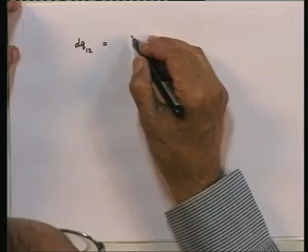Last time, we had derived the expression for the rate of heat exchange between two differential areas dA1 and dA2 at temperatures T1 and T2. Let me repeat that expression: dQ1 to 2 equals sigma by pi, cosine beta 1 cosine beta 2 divided by L squared, multiplied by T1 to the power of 4 minus T2 to the power of 4, dA2 dA1. That was the expression which we had derived.

That is where we stopped, we got this expression. Now we want to extend this expression to the situation where we have two finite size black surfaces maintained at uniform temperatures T1 and T2. That is what we want to do.

So let us go back and see the sketch again. These are the two surfaces. This is surface A with an area A1, and this is the surface with area A2. Let me write this again in big letters since it is rather small here. This is A1, this is the finite area A2. They are both black, and A1 is maintained at a temperature T1, A2 is maintained at temperature T2. We would like to know what is the net radiant heat exchange rate between A1 and A2.

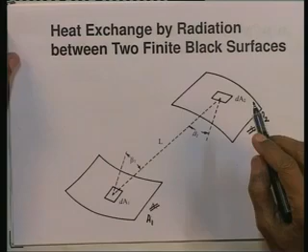Now suppose I take some differential area dA1 on A1 and some other differential area dA2 on A2, join the two areas by this line, and let the length be L like last time. Then we know the expression for heat exchange between dA1 and dA2. So let us extend that now.

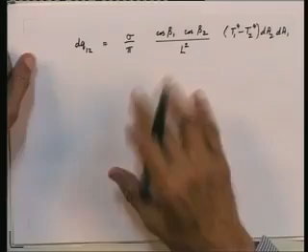Obviously, if we want to know the value for two finite size surfaces, and we know the expression for two differential areas, it follows that all we have to do is integrate the expression for differential areas. We will have to integrate over the area A1 and also over the area A2. So if I want Q1 to 2, that is the heat exchanged by radiation between A1 and A2, canceling out the d, I will integrate this expression twice, over the area A1 and A2.

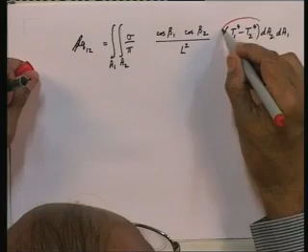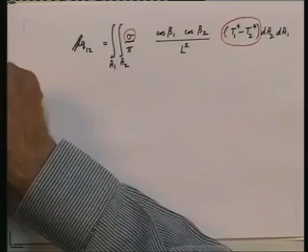That is our expression for Q1 to 2. Now, T1 is a constant, T2 is a constant, so T1 to the power of 4 minus T2 to the power of 4 is a constant. I can take it outside the integral, and let me also take sigma outside the integral. If I take both these outside, which is permissible, then I will end up with the expression. Let me show that.

As is written here, if the surfaces A1 and A2 are at uniform temperatures T1 and T2, then the net radiative heat exchange rate between A1 and A2, Q1 to 2, becomes the following. I have just taken sigma and T1 to the power of 4 minus T2 to the power of 4 outside the integrals, because they are constants, and the quantity within square brackets is the integral which I will have to perform first over the area A2 and then over A1, or vice versa - it does not matter.

Now let us again, like in the earlier situation, define a shape factor. This expression is fine, but let us put it in terms of a shape factor. So we define the shape factor of surface 1 with respect to surface 2, f1 to 2, as 1 upon A1 times the quantity which I had earlier within square brackets - that integral over A1, integral over A2, of cosine beta 1 cosine beta 2 upon pi L squared, dA2 dA1.

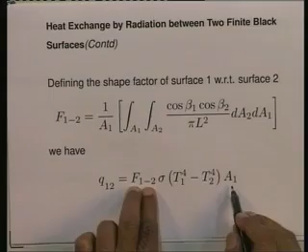Note that the definition is not just some arbitrary definition, we have defined it in that manner. If I take the first part, f1 to 2 sigma T1 to the power of 4 into A1, you can see sigma T1 to the power of 4 into A1 represents the total amount per unit time emitted from surface 1. If I multiply by f1 to 2, I get the amount that goes from 1 towards 2, is intercepted by 2, and because 2 is black is also absorbed by 2. So again, I am defining shape factor with that physical meaning in mind, it is not some arbitrary definition with an integral in it, keep that in mind.

Alright, so we could also define a reverse shape factor, in the reverse direction, that is from surface 2 to surface 1. I could say f2 to 1, the shape factor of 2 with respect to 1, is equal to 1 upon A2, the integral over A1, the integral over A2, cosine beta 1 cosine beta 2 pi L square dA2 dA1, the same quantity within the square bracket that we had earlier.

And therefore we could say q1 to 2 is equal to f2 to 1 sigma T1 to the power of 4 minus T2 to the power of 4 multiplied by A2. We should note again that the two shape factors f1 to 2 and f2 to 1 are related by a reciprocal relation, f1 to 2 A1 is equal to f2 to 1 A2. Keep this in mind, that is a reciprocal relation relating the two shape factors, they are not two independent quantities. So we have expressed the quantity q1 to 2, which represents the net radiative heat exchange rate between 1 and 2, in three ways.

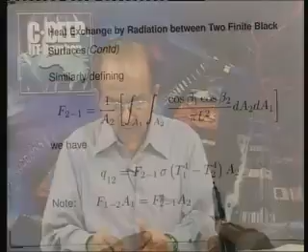First, we have expressed it without a shape factor, that was the first expression which we got simply by putting two integrals on the expression for dq1 to 2. Secondly, we have expressed it in terms of f1 to 2, and said q1 to 2 is equal to f1 to 2 sigma T1 to the power of 4 minus T2 to the power of 4 multiplied by A1. We have also expressed it in the reverse manner by saying q1 to 2 is equal to f2 to 1 sigma T1 to the power of 4 minus T2 to the power of 4 into A2. We got three different ways, all equivalent, for the same quantity.

Alright, now we want to move ahead. We have considered two situations. What are they? We have considered heat exchange rate between two differential areas dA1 and dA2, and we have considered heat exchange rate between two finite sized areas A1 and A2.

Now suppose we have a situation in between the two, that means we want to consider heat exchange by radiation between a finite black surface, that is one area is big and one is small. Small means like a differential area, a small black surface A1 which is like dA1. Suppose we have this situation, a small area and a large area, and we want to calculate heat exchange rate between them, heat exchange by radiation between them, if they are maintained at two temperatures T1 and T2. So that is the next situation, the third situation, which is in between the first two situations we have considered, and this is rather easy to derive. It should not be a problem.

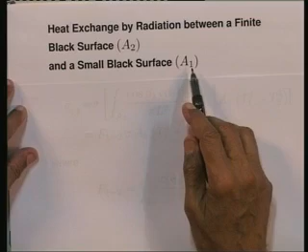Let us go back again. So let me repeat, we are deriving the heat exchange by radiation between a finite black surface A2 and a small black surface A1. That is what we are doing now. A1 can be treated like dA1, keep that in mind, because it is small. So to derive it, go back to our initial expression for dq1 to 2. What was our expression?

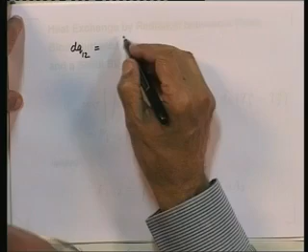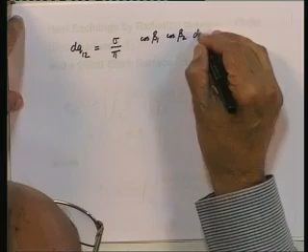dq1 2 between two differential areas: sigma by pi, cosine beta 1, cosine beta 2, dA1 dA2 divided by L squared, multiplied by T1 to the power of 4 minus T2 to the power of 4. That is our expression for heat exchange by radiation between two differential areas.

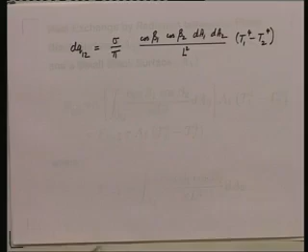Now we want to modify this expression when one area is small and one is large. The small area is A1 and we can treat it like dA1. That means I can simply replace dA1 by A1, because it is a small area. Once again, T1 is a constant, T2 is a constant, so I can take this expression outside the integral sign.

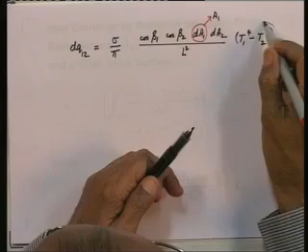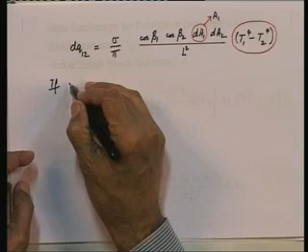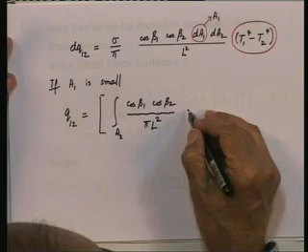So, what do we get now? If A1 is small, I need not perform the integration over A1 and can treat dA1 as just A1, and I will simply get q1 to 2 in this case equal to the quantity within square bracket, which is the integral over A2 only, of cosine beta 1 cosine beta 2 divided by pi L squared dA2, the whole thing multiplied by sigma A1 times T1 to the power of 4 minus T2 to the power of 4.

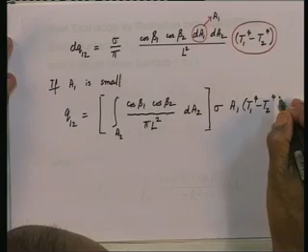That is what we get as the expression for Q12. So, all we have done is substituted A1 for dA1, because A1 is small, equivalent to a differential area, and taken T1 to the power of 4 minus T2 to the power of 4 outside, because they are at uniform temperatures, so that expression is a constant, and the rest within the square bracket is obviously a shape factor.

So, I can say this is equal to F1 to 2 sigma A1, T1 to the power of 4 minus T2 to the power of 4. So, again now I have an expression for the heat exchange by radiation between a small surface A1 and a large surface A2, and the expression is given here. I can use the first expression, or I can use the second expression in terms of a shape factor F1 to 2, being nothing but the quantity within the square bracket.

So, the shape factor F1 to 2 is nothing but the quantity within the square bracket. And again it has the same physical meaning: it stands for the fraction of the radiation emitted by 1 which goes towards 2 and is intercepted by 2. That is the meaning of the shape factor.

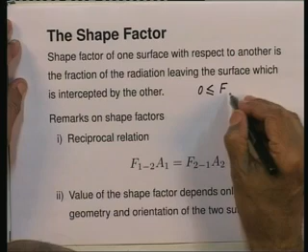Now, let me again define shape factor. I have done it earlier, but I repeat: the shape factor of one surface with respect to another is the fraction of the radiation leaving the surface which is intercepted by the other. That is our definition of shape factor. By definition, shape factor must be between 0 and 1, a number between 0 and 1. Let me write that here: by definition, shape factor f, whatever it be, between two surfaces A and B, must be between 0 and 1. It is bounded always by definition.

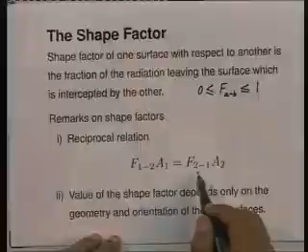Now, let us make some remarks on shape factors. The first remark, which I have made earlier and am repeating, is that between the shape factors of two surfaces 1 and 2 - the shape factor of 1 with respect to 2 is called f1 to 2, the shape factor of 2 with respect to 1 is called f2 to 1. Between these two shape factors, by definition, we have the relationship f1 to 2 times A1 equals f2 to 1 times A2. We have this definition, by definition we have this relation. This is called the reciprocal relation.

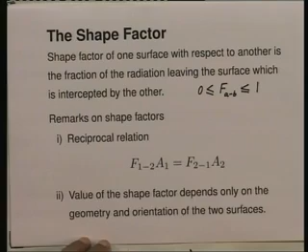Now, it is an obvious relation because it follows from the definition, but the real reason why I am mentioning it is to point out the utility of this reciprocal relation. The relationship is particularly useful when one of the shape factors, either f1 to 2 or f2 to 1, is unity.

Now, when does this happen? When is the shape factor f1 to 2 or f2 to 1 equal to unity?

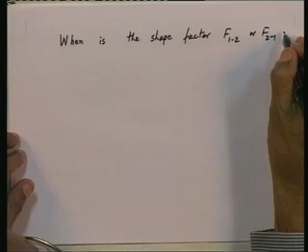If you ask the question, obviously if all the radiation emitted by surface 1 is intercepted by 2, none of it goes back to 1, then the shape factor of 1 with respect to 2 is unity. Or the reverse, f2 to 1 will be unity when all the radiation emitted by 2 is intercepted by 1, it goes nowhere else, it does not even go back to 2.

And when does this happen? This will happen when the surface 2, I am talking of f1 to 2, will be unity when surface 2 completely surrounds 1 and surface 1 is completely convex. Let me give an example.

Suppose I have a sphere, or a spherical shell, it does not matter, and I call it surface 1. Let us say this sphere is inside a room, a sphere of any size inside this room. So let me draw this room here, it is a rectangular room with 6 faces. On this paper I am drawing only 4, but remember it has 6 faces. I will call this the surface 2, the room.

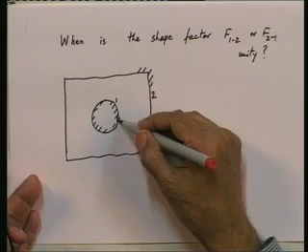Now, consider radiation emitted from the surface of 1. Surface 1 is spherical, it is a sphere. Radiation emitted from any element on surface 1, anywhere, has to first hit 2, it has no choice. Therefore, in this case f1 to 2 is equal to 1, got it.

But mind you, suppose just to illustrate, 2 surrounds 1, but that is not enough. No radiation from 1 should go back to 1 itself. Consider for instance that the object inside, that is 1, is not a sphere but has some shape like this, and this is still surface 2, which is this room.

Now you can see if I take an element on this surface, radiation going out from any element like this, some of it will go and hit surface 1 itself. So if the surface of 1 is concave in some place, not everywhere but any place, then part of the radiation from 1 will come back to 1 itself, in which case f1 to 2 will not be equal to 1.

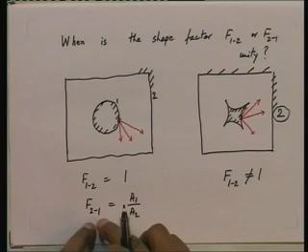If you see from the definition, f2 to 1 will have a double integral expression, which is not easy to solve. But using the reciprocal relation, I can straight away tell f2 to 1 is equal to a1 upon a2. So you see the benefits of using the reciprocal relation in some cases.

So that is the first remark we wanted to make about shape factor. The second remark, which is rather important, is the following: the shape factor depends only on the geometry and orientation of the two surfaces.

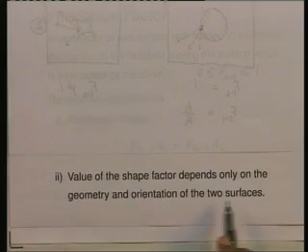You will notice when we put the definition, we took temperature outside the definition. There is no T1 or T2 in that definition. So shape factor does not depend on the temperatures of the surfaces, it depends strictly on the geometry.

What are the shapes, what are the sizes of the surfaces involved, what are the relative orientations, how are they oriented with respect to each other. That is what shape factor depends on.

Because of this definition, I can do shape factor calculations in advance for a variety of shapes and situations encountered in practice. I do not need to know their temperatures for calculating radiant heat exchange. For geometries frequently encountered in practice, for those shapes, sizes, orientations of surfaces, I can do shape factor calculations and have those available as values which I can use any time for doing radiant heat exchange calculations, and that is what people do.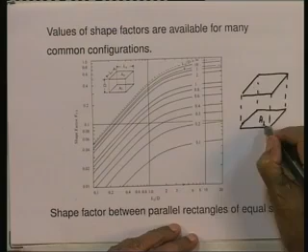Since it is not so clear, let me draw it again. One parallel rectangle could be this, and the other parallel rectangle of equal size, which is below, is this. I call this surface 1, A1, and this 2, A2. A1 and A2 are two rectangles of equal size, parallel to each other and opposite each other, like the floor and the ceiling of this room.

These are two parallel rectangles of equal size facing each other, or the two walls of this room, the two side walls which I am pointing to. These two are two rectangles of equal size facing each other, or the other two walls, one behind me and one in front of me, they are also like that. So any two walls, the floor and the ceiling, are two parallel rectangles of equal size facing each other.

The shape factor for that has been calculated, and that is what is given in this graph. The shape factor f1 to 2 is plotted, read off from the y axis, and it is given as a function of

two parameters, L1 by d and L2 by d. That is how it is given. L1 and L2 are the sides of the rectangles - this is L1 and this is L2 - and d is the distance between the two rectangles.

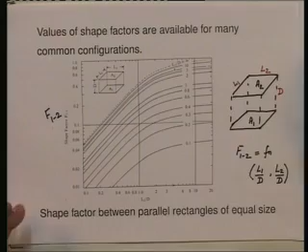So the shape factor f1 to 2 is given as a function of L1 by d and L2 by d. That is what we have in this graph. So any time you have this situation in practice, all you have to do is, for the given situation, calculate the two parameters L1 by d, L2 by d, and go to this graph.

L2 by d is given on the x axis, and L1 by d is the parameter which is varying between each graph drawn here. So in this case, this is the graph for L1 by d equal to 1, L1 by d equal to 2, L1 by d equal to 3. The final one which is dotted is L1 by d equal to infinity.

So all values of L1 by d from 0.1 to infinity are covered in this graph. Similarly, L2 by d is covered from 0.1 to 20. So all situations in practice are covered in this graph. For a given situation, calculate L1 by d, calculate L2 by d, go to this graph at L2 by d, go to the appropriate curve for L1 by d, and read off the value of f1 to 2. That is what you will have to do.

Now, this is just one example I showed. This is one example of shape factor calculations which have been done by somebody else, which are available to us for usage whenever we have to do radiant heat exchange calculations. Such graphs or equations corresponding to these graphs are available for a very wide variety of common configurations, a very large number of them are available. Let me show you one more example, so that you get the idea. Here is one more example now.

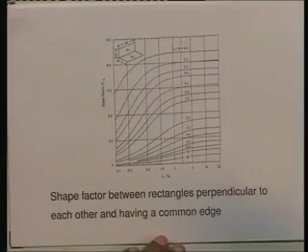Here is a shape factor between rectangles which are perpendicular to each other and have a common edge. It is drawn rather small here, so let me draw it again.

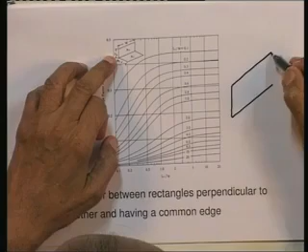These are two rectangles: this is one rectangle, this is another rectangle. They have a common edge and are perpendicular to each other, and the dimensions are L1 and L2 and W. So one of the rectangles is L1 into W, the other one is L2 into W, and they are at right angles to each other.

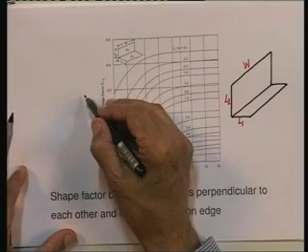We would like to know the shape factor. Now, for this case also, shape factor has been calculated and is available to us. On the y axis we have f1 to 2, on the x axis we have L2 by W, and the different graphs drawn are for varying values of L1 by W.

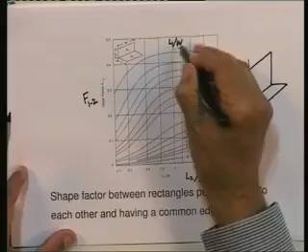So given a particular situation, say this could be the floor of this room and one of the side walls, or the ceiling of this room and one of the side walls. There are two situations of two rectangles at right angles to each other with a common edge. It could be any one of these.

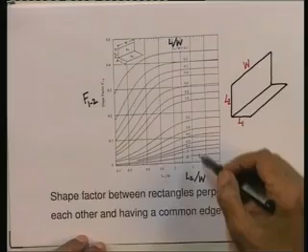Now, given this situation, to do a radiant heat exchange calculation, calculate L2 by W, calculate L1 by W, and then from this graph read off the value of f1 to 2. So f1 to 2 is a function of L1 by W and L2 by W.

Got it? So again, this is a very common configuration, and somebody has done this integral for us and we have got the expression for us to use any time we need it. As I said, there are literally hundreds of situations for which shape factor calculations have been done, and the values are available either in the form of graphs, equations, tables, whatever it is, for us to use any time we have to do radiant heat exchange calculations.

So this is the second remark: the value of shape factor depends only on geometry. It has been calculated for a wide variety of situations and configurations which are commonly used in practice, and these are available in textbooks and handbooks for us to readily use.

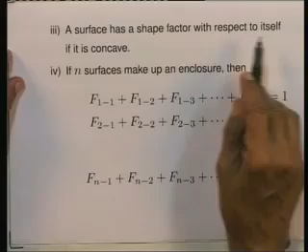The third remark I want to make is the following, which I made earlier and am repeating: a surface has a shape factor with respect to itself if it is concave. This is a remark I made a little earlier, but let me repeat it. What I mean is the following.

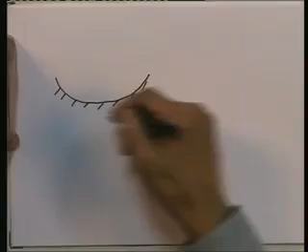Suppose I have a surface like this, a concave surface, surface 1, emitting radiation. If I take some element on this surface, radiation is emitted in all directions of a hemisphere, but some of the radiation emitted is obviously going to come back to the surface itself. So in this case, because the surface is concave, it follows that f1 to 1 is not equal to 0.

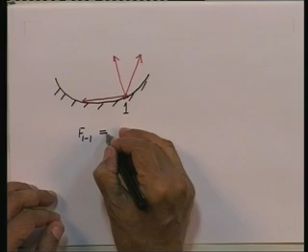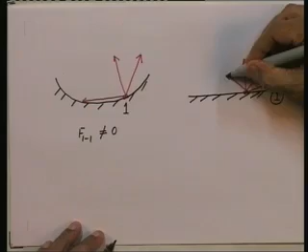On the other hand, if surface 1 is flat, and I consider radiation emitted from any elementary area on this surface, you will agree that radiation emitted from surface 1 anywhere on it will go out like this and will not be intercepted by surface 1. So this is a case where f1 to 1 will be equal to 0. Or let us take the case when surface 1 is convex like this—then also f1 to 1 is obviously equal to 0.

Now mind you, just to clarify, surface 1 may be flat, surface 1 may be curved, or surface 1 may be consisting of two flat surfaces together—that also may be surface 1.

For instance, let us go back to this room. Here is our room—let me draw it in 2 dimensions. This is my room, in which I am sitting. If I want to do a radiant heat exchange calculation and treat all the surfaces, the 6 surfaces of this room, as being independent, I will call them 1, 2, 3, 4, and the 2 surfaces which I can't show here, which in 3 dimensions will be seen as 5 and 6. So I will have 6 surfaces.

Now if I treat the 6 surfaces as independent of each other, f1 to 1, f2 to 2, f3 to 3, for each of these surfaces will be 0. But let us say surface 1 and 2 are at the same temperature. So for purposes of calculating radiant heat exchange, I can treat 1 and 2 as one surface. Then it follows that surface 1 and 2, if I treat it as one surface, call it surface A.

It follows that for this surface A, which consists of 1 and 2 together, 2 rectangles together with a common edge, the shape factor of surface A with respect to itself will be non-zero. For this case, f 1 to 1 was 0 if 1 is only a flat surface, and f 2 to 2 will be 0, but if 1 and 2 are treated as one surface together, call it A, that is 1 plus 2 equivalent to surface A, then f A to A

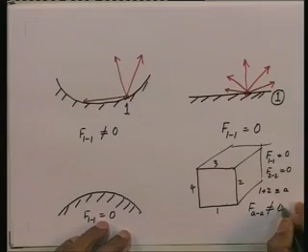is non-zero. So a surface may be flat, a surface may be curved, a surface may be a combination of 2 flat surfaces, 2 curved surfaces, 1 flat and 1 curved surface, whatever it is, it is up to me to decide depending upon the radiant heat exchange calculation I have to do. For that situation, once I have defined what my surfaces are, I have to see whether f 1 to 1 or f A to A is 0 or non-zero. This is a remark about a surface having a shape factor with respect to itself.

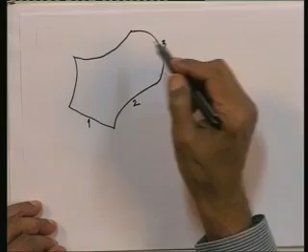Now let us go to one more important relation. Suppose I have an enclosure made up of n surfaces. Let us say I have some enclosure, and just to make things messy, I have drawn one as a flat surface, surface 1, surface 2 as a convex surface, surface 3 as a concave surface, then surface 4 again as convex, and surface 5 also as convex. I have drawn a 5 surface enclosure in 2 dimensions here. Let us say these 5 surfaces make up an enclosure. I could think in general terms of an n surface enclosure making up an enclosure.

So the n surfaces may be flat, they may be curved, the curved surfaces may be convex or concave, it does not matter. Now if these n surfaces, 1, 2, 3 up to n, make up an enclosure, then it follows that all the radiation emitted from any one surface, say surface 1, has to go to all the other surfaces, that is surface 2, 3, 4 etc.

up to n, and to surface 1 itself if f 1 to 1 is non-zero. So I can state that as follows. For an n surface enclosure, f 1 to 1 plus f 1 to 2 plus f 1 to 3 plus dot dot dot f 1 to n is equal to 1, because all the radiation emitted from 1 has to go either to 1 or to 2, 3 up to n, all that must add up to 1. And if 1 is a flat surface or if 1 is convex, then this f 1 to 1 will automatically be put as 0.

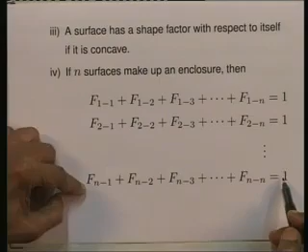Similarly, consider the radiation emitted from surface 2. It follows that f 2 to 1 plus f 2 to 2 plus f 2 to 3 plus f 2 to n is equal to 1, and so on. If I consider the nth surface of this enclosure, f n to 1 plus f n to 2 plus f n to 3 dot dot dot f n to n is equal to 1. So I can write down n such equations for the n surfaces making up this enclosure. These are relations between all the shape factors when surfaces make up an enclosure, and we will use these to calculate one shape factor from another.

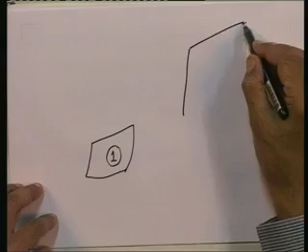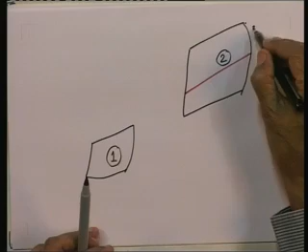That is the advantage. The last remark I want to make is the following. Suppose I have two surfaces, 1 and 2. Let us say I have surface 1, some arbitrary surface, may be curved or may not be curved, and let us say I have surface 2 like this, arbitrarily located in space, two finite size surfaces. Let us say I break up surface 2 into two parts, calling this surface 3 and this surface 4. That means A2 is equal to A3 plus A4. The two surfaces 3 and 4 make up surface 2.

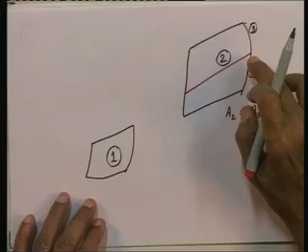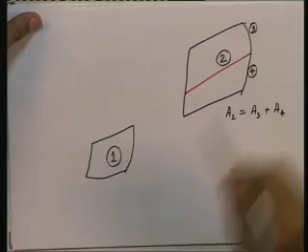Now, radiation going from 1 towards 2, the fraction of radiation going from 1 towards 2 is F1 to 2. It follows that since 3 and 4 make up 2, F1 to 2 must be equal to F1 to 3 plus F1 to 4. It follows, isn't it? So let me show that in writing. It follows that F1 to 2 must be equal to F1 to 3 plus F1 to 4 if the two areas A3 and A4 make up the area A2. Keep that in mind. But note, the reverse is not true.

Many people sometimes will say F2 to 1, F3 to 1 and F4 to 1. These are the reverse shape factors in the reverse direction. This F2 to 1 is not equal to F3 to 1 plus F4 to 1. Keep that in mind. All right. From the definition itself you can see that this is not true. F2 to 1 is not equal to F3 to 1 plus F4 to 1. Please do not make this mistake.

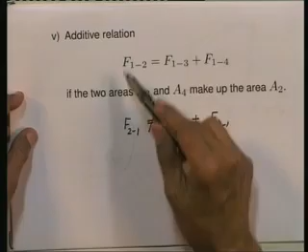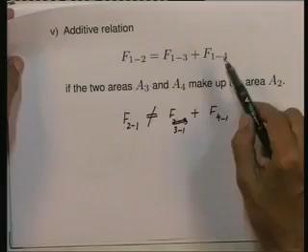The additive relation which we can use is F1 to 2 is equal to F1 to 3 plus F1 to 4, and this follows from the physical meaning of shape factor. Radiation going from 1 intercepted by 2. If 2 consists of 3 and 4, radiation going from 1 towards 3 and from 1 towards 4, the sum of the two fractions must be equal to the first fraction F1 to 2. So keep this in mind. The first relation is valid, the second is not. The first one is called the additive relation.

So these are various relations between shape factors that we have given, and the advantage will be obvious from various situations which we have to consider. Now we will do some problems in which we calculate shape factors for a variety of situations, so that you get used to using these relations. I am going to do some problems. So the first problem I am going to do is the following. Let us do the following problem.

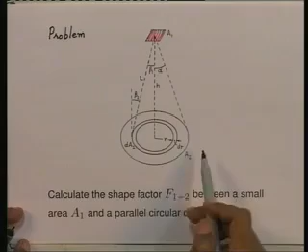Calculate the shape factor F1 to 2 between a small area A1 and a parallel circular disc A2. Here is the small area A1, let me just shade it in red. It is a small, differential area A1, and parallel to it a circular disc A2 is like this. So we have this table, on this table I have a circular disc. At the center of the disc, let me draw a perpendicular at the center of this disc and go up a certain distance h. At that distance h, consider a small area A1, a differential area parallel to the plane of this table. All right, that is what we are talking about.

We would like to calculate f1 to 2. We are going to use obviously the formula which we derived for shape factor between a small area A1 and a large area A2. So what is the formula? Let me just put that down.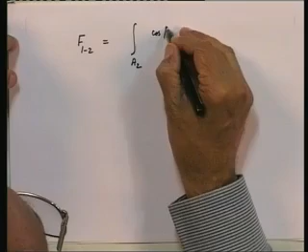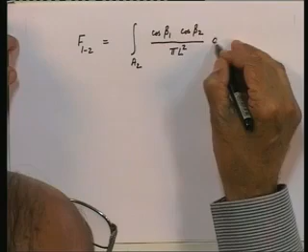For such a situation, we know f1 to 2 for the case with a small area. If you go back in your notes, you will see it is nothing but the integral over A2 of cosine beta 1 cosine beta 2 divided by pi L squared dA2. Okay, that is our expression.

Now let me go back to the sketch here. We must take our dA2. In this case, we have symmetry. We want the radiation coming from one which falls within this cone. All right. So since we have symmetry, for dA2, I can take a ring of thickness dr at some radius r. We have got symmetry all over. I do not have to take dA2 as r d theta dr in cylindrical polar coordinates. I can take a ring at a radius r of thickness dr. So my dA2 will be 2 pi r dr.

Okay, let us take that as our dA2. So take dA2 to be, let me write that down, because of symmetry, we will take dA2 to be 2 pi r dr. And therefore, I can now perform the integration.

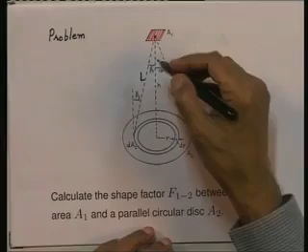I say the distance between the two surfaces is h and the semi vertex angle, let me again show the sketch. The distance between the two surfaces is h, the semi vertex angle subtended by this disc, circular disc, at A1 is alpha. Now, using our nomenclature, if I join A1 to dA2, the distance between the two will be the capital L which we have in our formula, and the angle made by this line joining A1 to dA2 and the normal, the two normals will be parallel to each other because the two surfaces are parallel, and the angles, this will be beta 1 here and this will be beta 2 here, and they will be equal in this case.

So let us substitute into our expression now, we will get f1 to 2, we are going to express everything in terms of the angle as the variable beta 1.

So we will get f1 to 2 is equal to cosine beta 1, cosine beta 2 is equal to beta 1. So I can write it also as cosine beta 1 divided by pi.

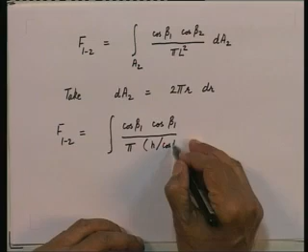Now instead of L, I will write L as h, the distance between the two surfaces, divided by cosine of beta 1 the whole squared, because beta 1 is my variable. For dA2 I will write 2 pi, for r I will write h tangent beta 1, that is r, and for dr I get by differentiating h tangent beta 1, I will get h secant squared beta 1 d beta 1.

That is my expression, and I will have to integrate this from 0 till the semi vertex angle which is alpha. So I will integrate this from 0 to alpha, that is over the whole area, then I will cover the whole area of the disc.

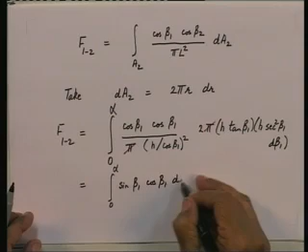If I do that, now I am skipping the details here, you can do the simplification, you can see that the cosine beta 1s will cancel out quite a bit, the pi's will cancel out quite a bit, etc. But it is very easy to show that this will reduce to nothing but the integral 0 to alpha sin beta 1 cos beta 1 d beta 1, very simple, you can do that yourself. And if I perform the integration and put in the limits, this will reduce to sin squared alpha.

So this is an example of the calculation of shape factor between a small area A1 and a parallel disc A2. It is a very simple example just to illustrate how to pick an area dA2 and to do the integral.

Now let us go on to another situation. I would like to calculate the shape factor using the graphs which I showed you earlier. So let us pick on another problem. We are going to do the following. I will just state the problem today.

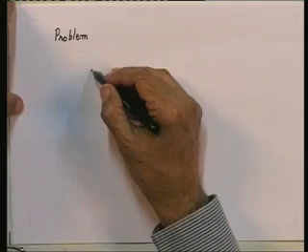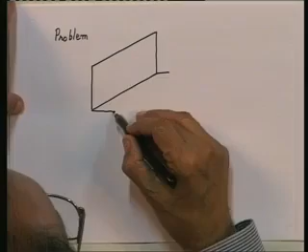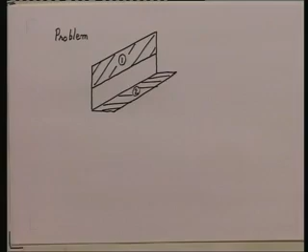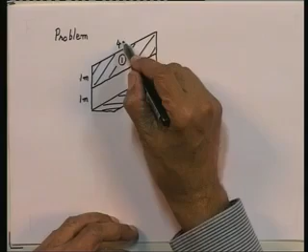The problem is the following: we have two rectangles like these. This is one rectangle, surface 1, and this is the second rectangle, surface 2. We want f1 to 2, dimensions are given: this is 1 meter, this is 1 meter, this is 4 meters, and this is also 1 meter. So these are two rectangles, 1 and 2, they are at right angles to each other, but they do not have a common edge.

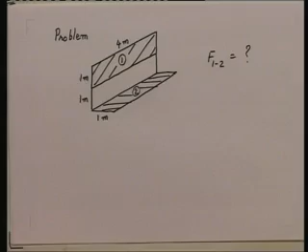We would like to get f1 to 2. Now mind you, I cannot read this off directly from the graph which I had earlier for two rectangles with a common edge. In that situation, remember we had the common edge case. Here we do not have a common edge, 1 and 2 are at right angles but do not have a common edge. Suppose I call this area, this rectangle, as surface 3, and I call 1 and 3 together as surface 4.

Now what can I read from the graphs which I showed you earlier? We can from those graphs get f3 to 2, this is known, or f2 to 3. Similarly we can get f4 to 2 or f2 to 4. These are available to us. So I need to express f1 to 2 in terms of these quantities, and that is what we can do very easily.

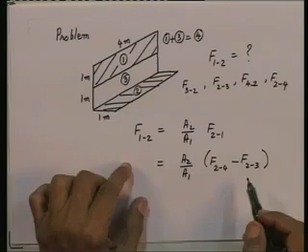We can say f1 to 2 is equal to A2 by A1 times f2 to 1. Here is my reciprocal relation, which from the additive relation is nothing but A2 by A1 times f2 to 4 minus f2 to 3. So I use first the reciprocal relation, then the additive relation, and when I do that, I have expressed f1 to 2 in terms of f2 to 4 and f2 to 3, which I can now read off from the graphs with calculations done earlier, which I showed you.

So from that, read off these two values for this case. I am telling you, if you read them off, you will get the first one to be 0.34, the second one will come out to be 0.27, and A2 by A1 is obviously 1 in this case. So you will get f1 to 2 equal to 0.07. I want you to do this yourself: for both these cases, for f2 to 4 and f2 to 3, calculate L1 by W and L2 by W, then go to those graphs, read off the values of the two shape factors f2 to 4 and f2 to 3, and then you will get f1 to 2 equal to 0.07.

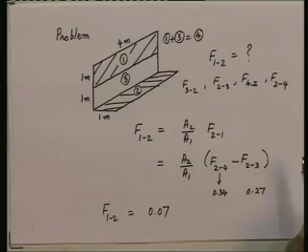So I am leaving that last part for you to do. The whole idea is to illustrate how those graphs can be used for calculating shape factors for other situations not corresponding exactly to the situation of those graphs. Now we will stop here today.